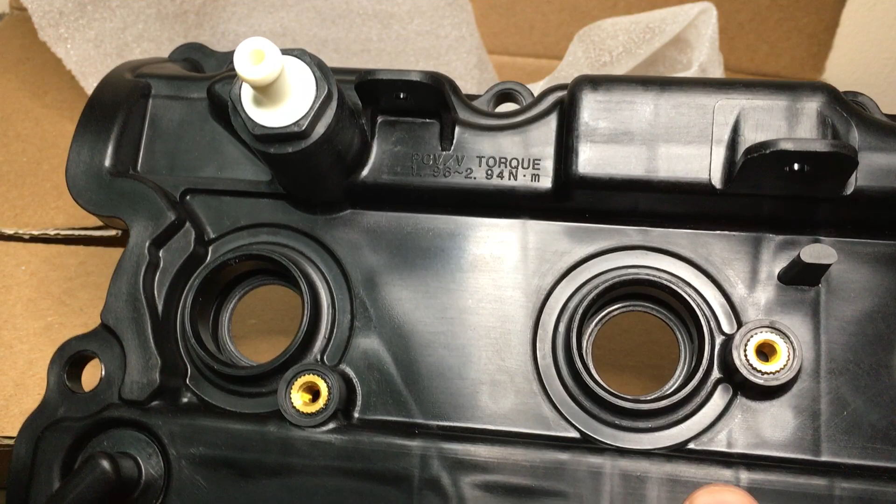So they just come wrapped in some styrofoam wrapping, and I'll just put that out of the way. The first thing I notice is the included PCV valve, which is good because this replacement is about $25.

There's some torque spec numbers here, this printed marking, and this marking. The other thing I noticed immediately was there was no Nissan branding anywhere on the cover—nowhere. That threw me off a little bit because you'd think genuine Nissan would put their branding somewhere to indicate it's an OEM part.

I installed this seal. This is the part number—made in Japan. This is the one for the other cover, also made in Japan. It holds fairly tightly, I guess because it has these tiny bumps on it, so when you go to install it, it doesn't fall out. It's pretty tight and seems well made too.

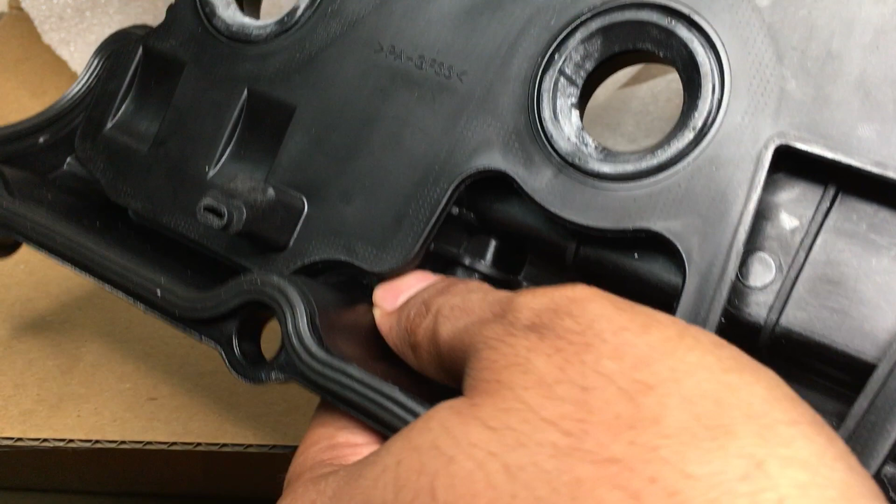The cover, even though it seems well made, there's a couple things I'm not too happy with. There's a piece of plastic or something sticking out there—I'll probably just cut that off. It shouldn't hurt the performance any.

But around the bolt holes, as you can see, it's not quite smooth—it's rough. That's not going to hurt the performance, but you'd think genuine Nissan or a genuine OEM part would be better made. That's probably just manufacturing, but I expected a little bit better, especially when you're paying triple the price compared to aftermarket.

Now the rubber that surrounds the spark plug holes is pretty tight—a little bit soft. The top side is all plastic, and this is the one that fits at the back. So if you're standing in front of the car, this would be at the back.

So let's look at the other one. I opened these and took a look myself before I did the video. As you can see, for some reason this one seems better made than the other one—maybe it's because of less chambers and less ports.

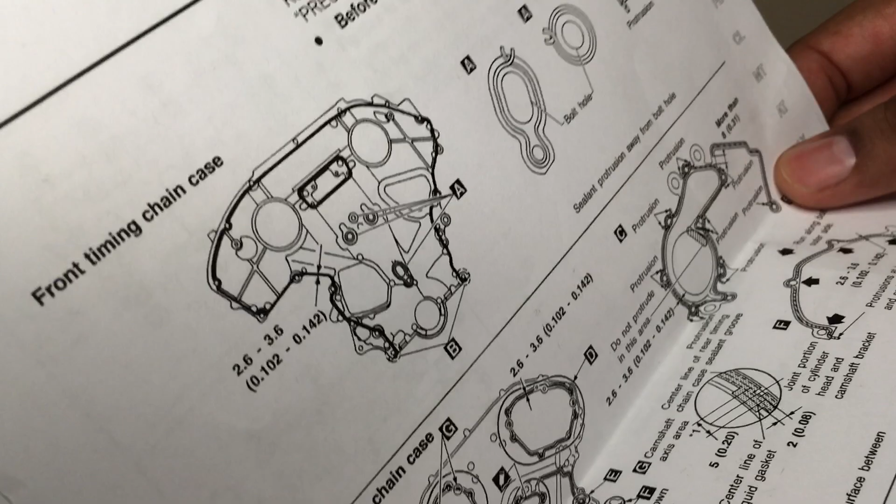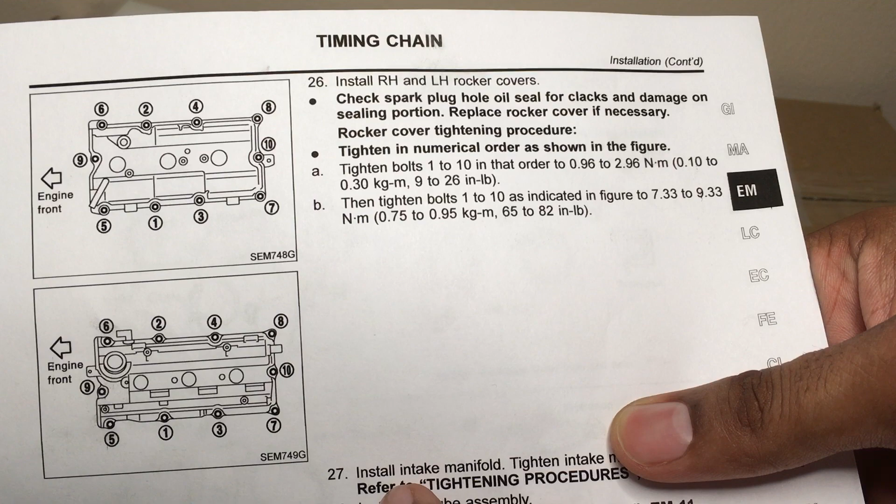One of the things I wanted to show everyone is the bolt tightening sequence for the covers. This is from the maintenance manual—as you can see, there's a specific way and a specific torque spec in order to tighten the bolts.

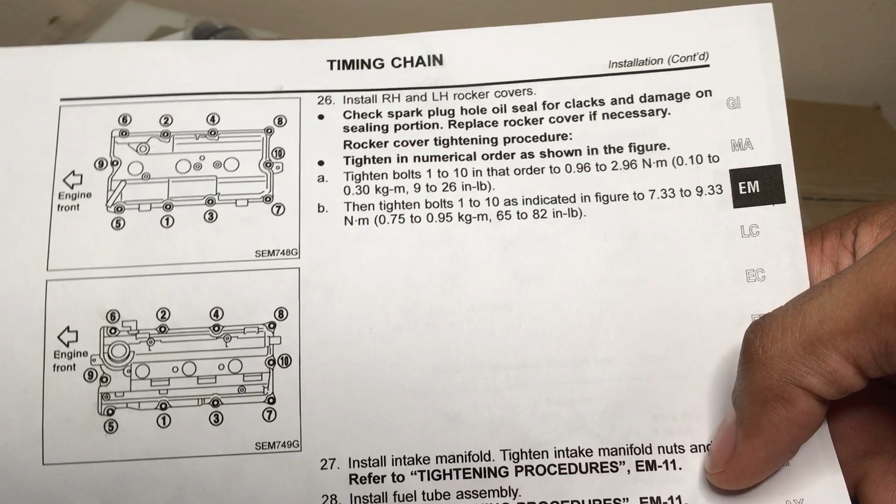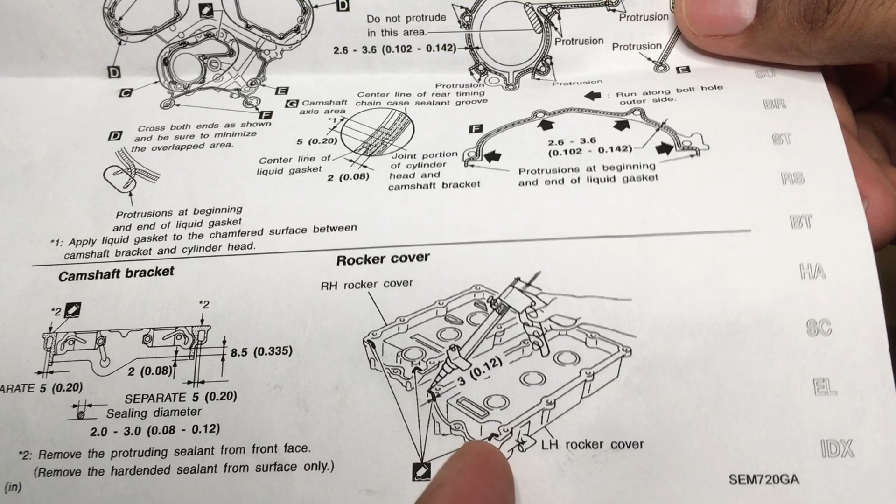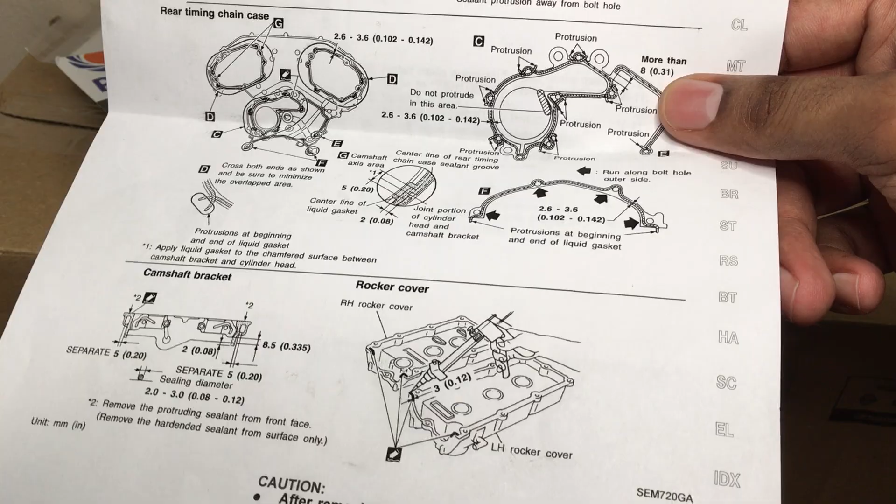Another thing I wanted to show you, which I think was very helpful—I found this in the maintenance manual. If you notice, they put gasket maker on the covers, on the corners, and only on the corners, and that's where it actually starts leaking. So I guess you put the seal in and then put the gasket maker on the seal. What I've noticed from other videos and installations is they actually put it on the block, which I think makes sense—you put it on the block, make sure the block is clean. You don't want to sand the block in any way, but you want to make sure it's free of any old seal, dust, or oils, because you want a secure installation.

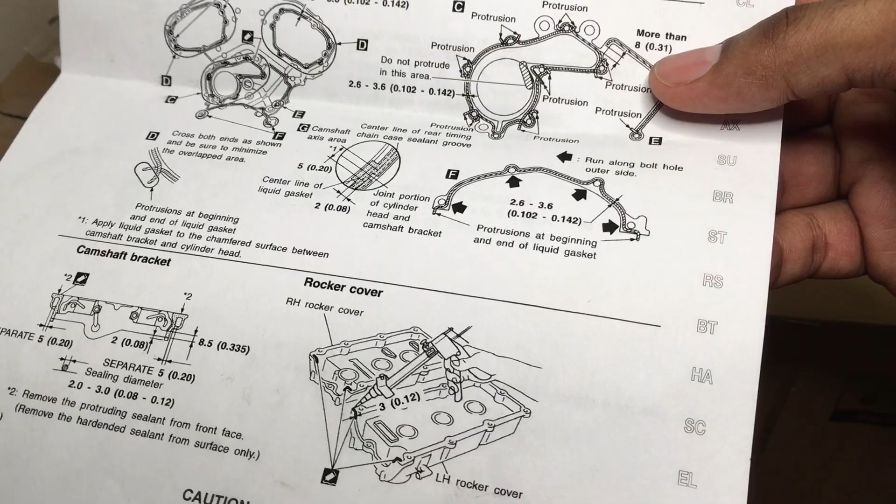I found this in the maintenance manual, so I hope that helps anyone who decides to do this themselves.

The reason I went with OEM this time is because the aftermarket parts seemed well made, but what I figured was it might just be the seals. So if you want to go OEM, I wouldn't necessarily recommend the whole cover, but at least get the OEM seal—knowing from my experience. Both OEM seals, this one and this one, were about $50 tax included. So at least get the OEM seal, so you have some assurance that these will work out just fine.

Other than that, I hope the installation goes as planned—it shouldn't take too long. I think a typical rocker cover installation runs maybe an hour or so, depending on the mechanic and the tools. So we'll see how it goes.